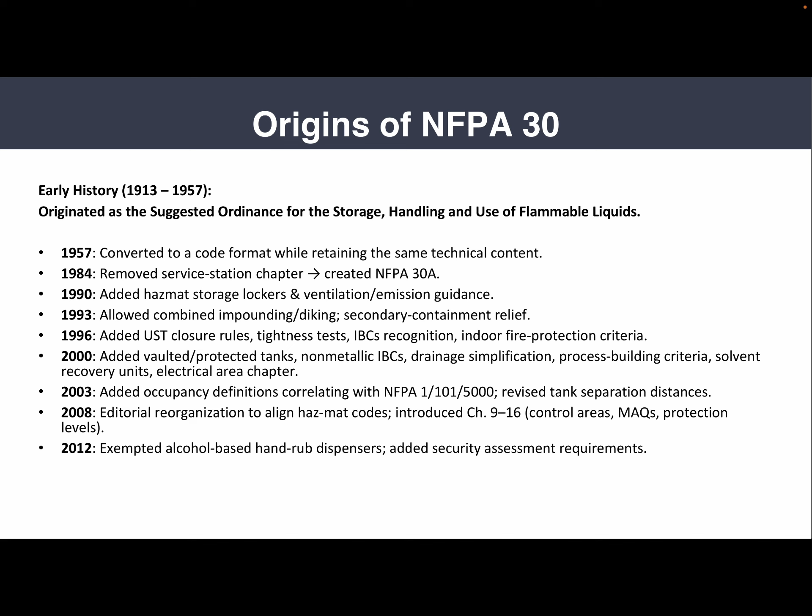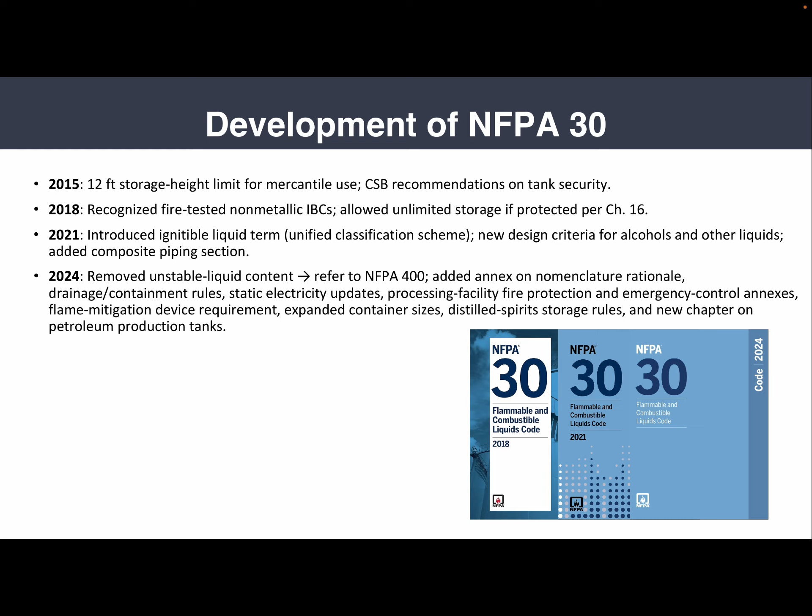Continuing the development of NFPA 30, in 2015 it set a 12-foot storage height limit for mercantile occupancies and adopted tank security rules. In 2018, it recognized fire-tested non-metallic intermediate bulk containers and allowed unlimited protected storage when criteria are met. In 2021, it introduced the term ignitable liquids to replace the old flammable and combustible system, making classification simpler. Finally, in 2024, it moved unstable liquid content to NFPA 400, added new annexes, and introduced flame mitigation devices. In summary, NFPA 30 grew from a simple ordinance into a comprehensive, data-driven code that reflects today's understanding of flammable liquid safety.

The contents of NFPA 30. NFPA 30 is structured so that each group of chapters addresses a specific stage of liquid management. Chapters 1 through 7 apply generally to any facility storing, handling, or using ignitable liquids. Chapters 9 to 12 cover storage in containers, portable tanks, and IBCs by occupancy type. Chapter 13 addresses detached unprotected buildings, while Chapter 14 covers hazardous material storage lockers. Chapter 15 governs outdoor storage, and Chapter 16 covers detailed fire protection design.

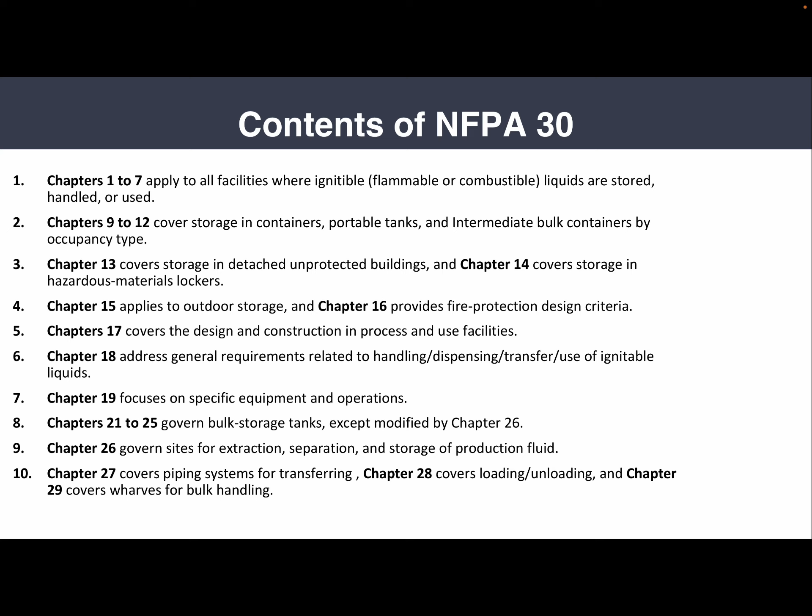Chapter 17 sets design and construction rules for process and use facilities. Chapter 18 covers handling, dispensing, transfer, and use of ignitible liquids. Chapter 19 focuses on specific equipment and operations. Chapters 21 to 25 govern bulk storage tanks. Chapter 26 adds requirements for petroleum production sites. Chapters 27 to 29 cover piping systems, loading and unloading facilities, and wharves. Knowing this helps move from general principles to detailed technical applications, and makes everything easier when you open the code.

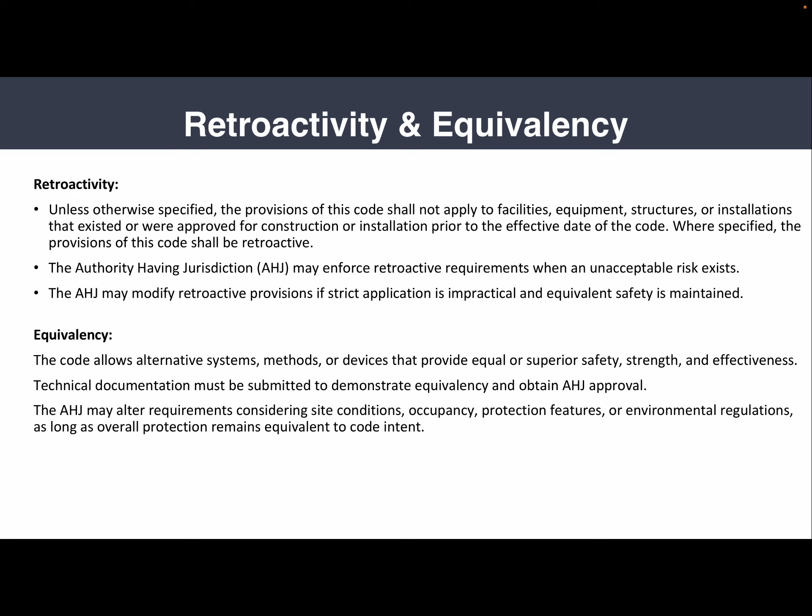The retroactivity and equivalency. NFPA 30 is primarily forward-looking. Its provisions do not automatically apply to existing installations or facilities approved before the current edition, unless a serious threat hazard exists. However, the AHJ, or authority having jurisdiction, may enforce retroactive measures if the existing condition presents unacceptable risk. The AHJ can also modify retroactive requirements when strict application is impractical, but equivalent safety measures can be shown. For equivalency, this allows alternative designs, systems, or devices that offer equal or superior protection.

Chapter 1, Administration. The applicability. NFPA 30 shall apply to the storage, handling, and use of ignitable liquids, which is flammable or combustible liquids, including waste liquids, as defined and classified. It serves as a model regulation intended to minimize hazards from flammable and combustible liquids while supporting safe commerce and industry.

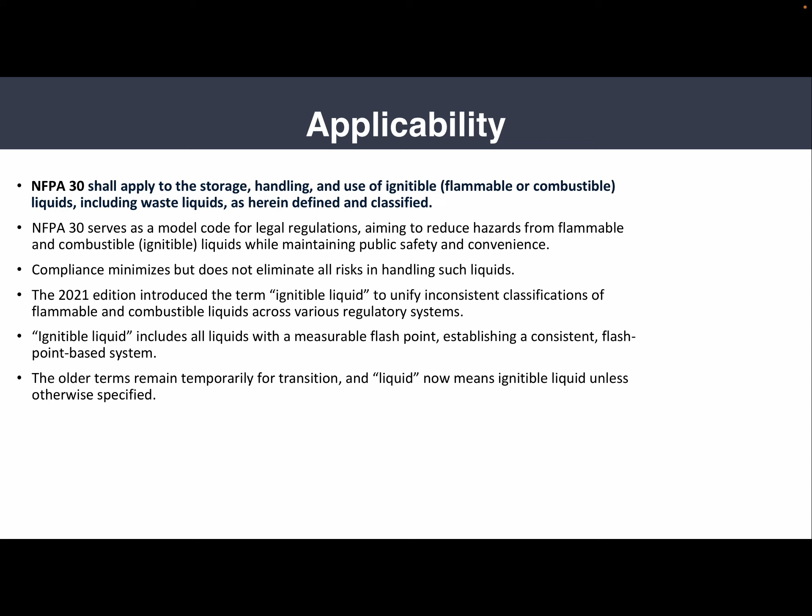So NFPA 30 serves as a model code. Compliance minimizes but does not eliminate all risk in handling such liquids. The 2021 edition introduced the term ignitable liquids to unify inconsistent classifications. Ignitable liquids includes all liquids with a measurable flash point, establishing a consistent flash point-based system. The older term remains temporarily for transition, and liquid now means ignitable liquid unless otherwise specified.

But also there's always an exemption. NFPA 30 shall not apply to the following: any liquid that has a melting point of 100 Fahrenheit, 37.8 Celsius, or greater; any liquid that does not meet the criteria for fluidity given the definition of liquid in Chapter 3 and the provisions of Chapter 4; and any cryogenic fluid or liquefied gas as defined in Chapter 3, since one is covered by NFPA 55 and the other by NFPA 58. Any liquid that does not have a flash point yet is capable of burning under specific conditions is also excluded.

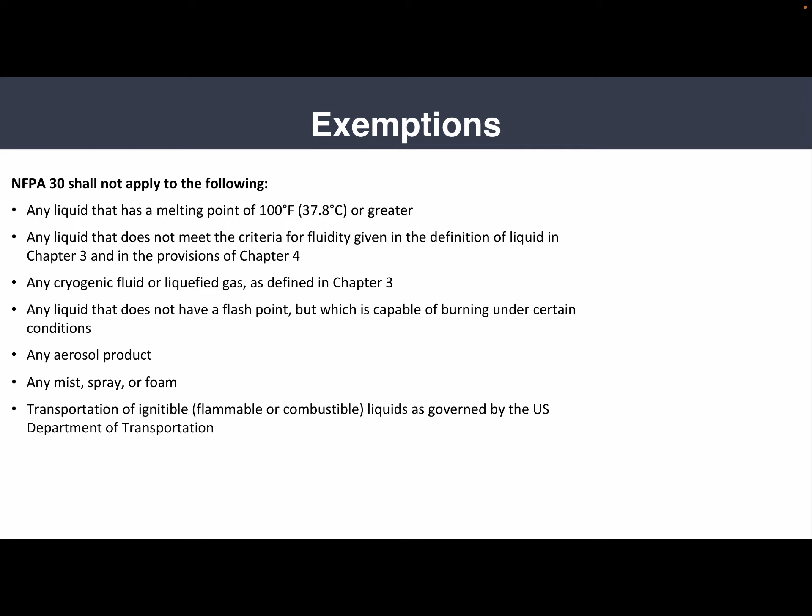Any aerosols, mist, spray, and foam are outside the code's scope. And transportation of ignitable liquid is governed by the U.S. Department of Transportation, the DOT, and not by NFPA 30.

Exemptions include the use of alcohol-based hand rub dispensers that comply with NFPA 101 or the adopted fire code, as well as liquids contained in the fuel tanks of vehicles, aircraft, boats, and stationary engines. Also, liquids that show no fire point when tested up to their boiling point are not covered.

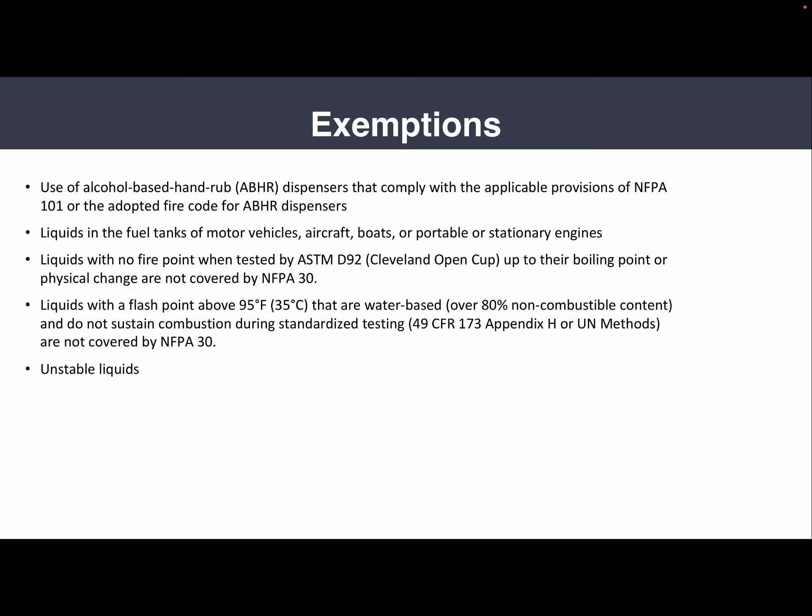Water-based liquids with over 80% non-combustible content that do not sustain combustion during standardized tests are also exempt. Finally, unstable liquids prone to violent reaction are managed under NFPA 400 instead. These exclusions allow NFPA to focus strictly on real ignitable liquid hazards.

Chapter 3, definitions. Here we have several key definitions. For example, alcohol-based hand rub means an ethanol or isopropanol solution up to 95% concentration designed to reduce microorganisms on hand. And a control area is a defined portion of a building where ignitable liquids are stored or used within the maximum allowable quantity limits.

And a fire area is a section of a building separated from the rest by construction having a minimum of 1 hour fire resistant rating.

And a barrel is equivalent to 42 gallons or 159 liters. And the boiling point is the temperature at which the vapor pressure of a liquid equals the surrounding atmospheric pressure.

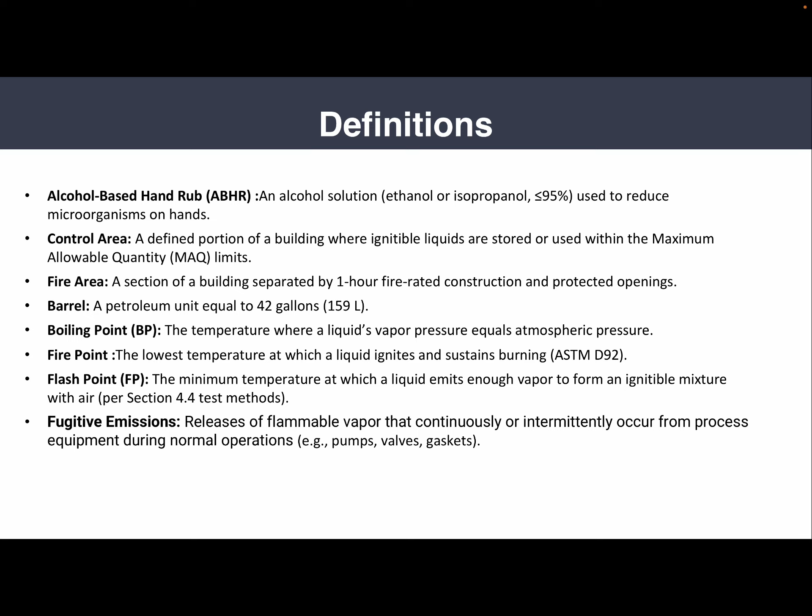The fire point is the lowest temperature at which a liquid will ignite and sustain burning, and the flash point is the minimum temperature at which it produces enough vapor to form an ignitable mixture with air.

And now here we have the key definitions for us. A flammable liquid refers to an ignitable liquid of class 1. A combustible liquid refers to an ignitable liquid of class 2 or 3. And ignitable liquids means any liquid with a measurable closed cup flash point.

A stable liquid will not react violently or decompose at normal pressure and temperature. An unstable liquid can decompose or explode when subjected to heat, shock, and pressure. A water miscible liquid mixes completely with water in all proportions.

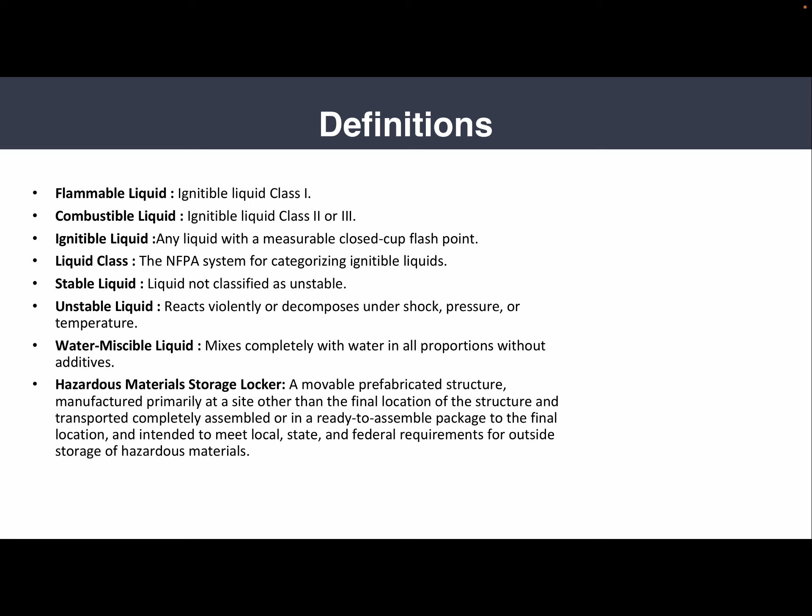And a hazardous material storage locker is a prefabricated or ready-to-assemble outdoor unit designed for code compliant storage of hazmat. These definitions lay the groundwork for every chapter that will follow.

Let's go back again. Class 1 liquids have a flash point below 100 Fahrenheit, which is 37.8 Celsius, and vapor pressure not exceeding 40 pounds per square inch at 100 Fahrenheit.

It is subdivided into class 1A, flash point below 73 Fahrenheit and boiling point below 100 Fahrenheit, and class 1B, flash point below 73 Fahrenheit and boiling point at or above 100 Fahrenheit. And we have class 1C, flash point at or above 73 Fahrenheit but below 100 Fahrenheit.

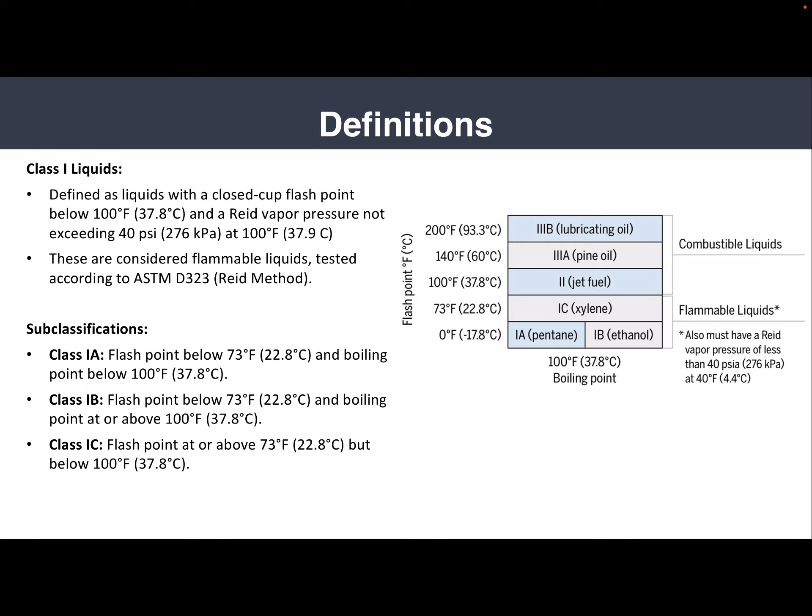And we have the class 2 liquids with a closed cup flash point at or above 100 Fahrenheit but below 140 Fahrenheit. And class 3, liquids with a closed cup flash point at or above 140 Fahrenheit. We also have sub-classifications for class 3, which is class 3A and class 3B.

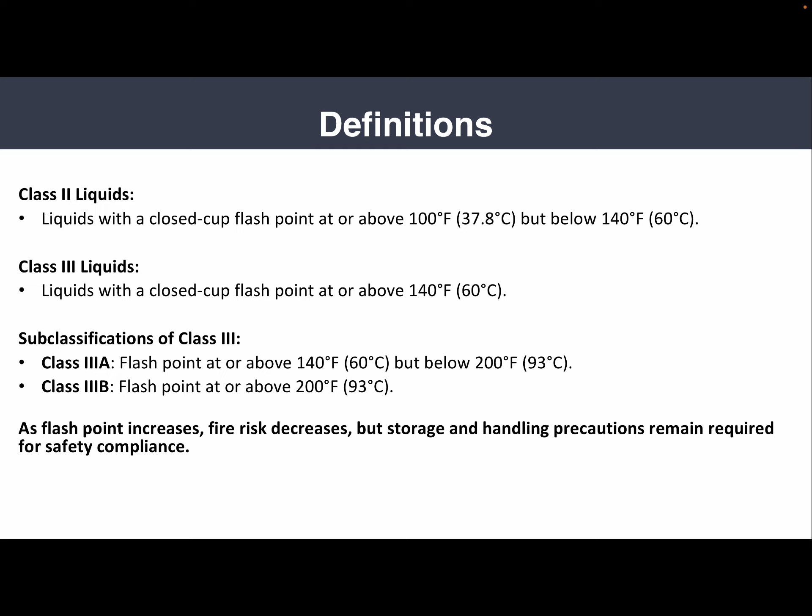One has flash point at or above 140 but below 200 Fahrenheit. The other has flash point at or above 200 Fahrenheit. So as flash point increases, fire risk decreases, but storage and handling precautions remain required for safety compliance.

And chapter 4 has the classification of liquids. This is just a diagram explaining the differences between all classes and the difference in temperature between combustible and flammable based on the flash point temperature.

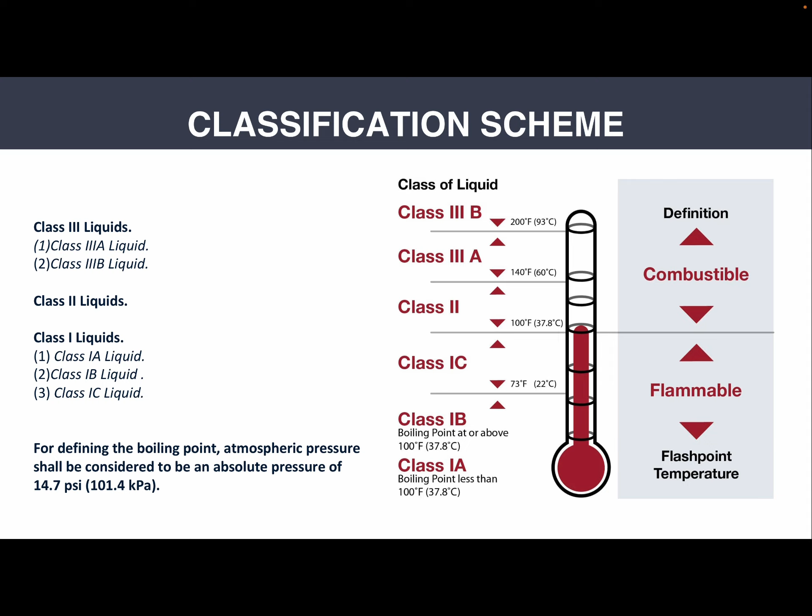A key point here for defining the boiling point: atmospheric pressure shall be considered to be an absolute pressure of 14.7 pounds per square inch or 101.4 kilopascal.

And chapter 6. Chapter 6 of NFPA 30 focuses on preventing the ignition of vapors and escalation of fires. It also established methods to identify, evaluate, and control fire and explosion hazards through management, analysis, and prevention. It requires engineering evaluation when handling liquids above flash point, exceeding maximum allowable quantities, or involving class 1 materials.

It requires facilities to identify potential ignition sources, such as open flames, electric sparks, hot surfaces, and static discharge. Also, proper ventilation, bonding, and grounding is essential when transferring or mixing ignitable liquids. Static electricity must always be controlled, especially during pouring, pumping, or any operations.

This code also references related standards such as NFPA 68 and 69 for explosion prevention and venting, and provides guidance for detection, alarms, and fire suppression systems using NFPA 13 and 750. It also guides housekeeping, leak control, and immediate cleanup of spills, which is critical.

Employees must be trained to recognize the hazards and follow safety procedures. So in short, this chapter ensures all the practical measures are taken to stop fires and explosions before they begin.

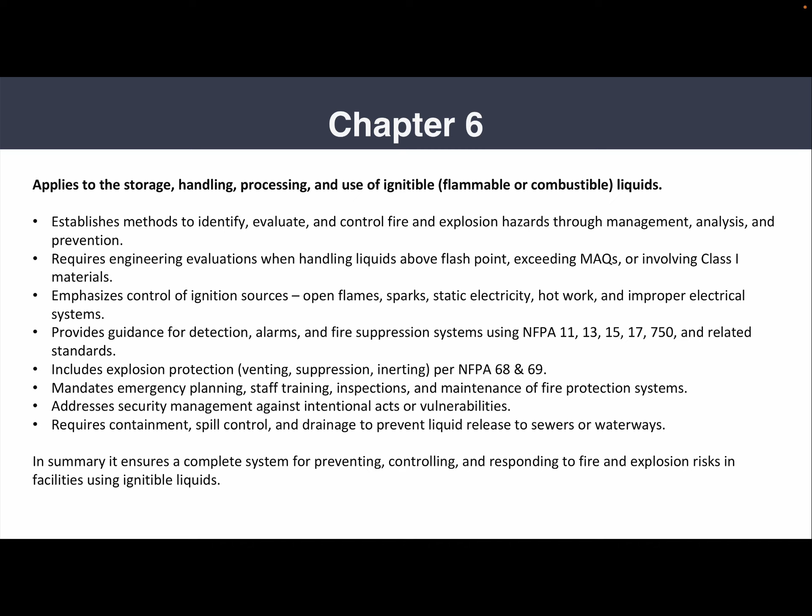Chapter 7, Electrical Systems.

The scope of Chapter 7 applies to all areas where Class 1 liquids are stored, handled, or used, and where Class 2 and 3 liquids are used at or above their flash points.

Electrical systems present one of the most common ignition sources in ignitable liquids operations. So Chapter 7 mandates that all electrical installations must comply with NFPA 70, the National Electrical Code. Areas where flammable vapors may exist are classified as Class 1, Division 1, or Division 2, depending on the frequency of vapor presence.

All wiring and fixtures within this zone must be approved for hazardous locations, and static grounding, bonding, and spark-proof equipment are vital. This ensures that a single electric arc cannot ignite vapors or gases released during normal operations or accidental leakage. Proper design of lighting, switches, and controls forms the foundation of electrical safety and should be correctly installed based on NFPA 70.

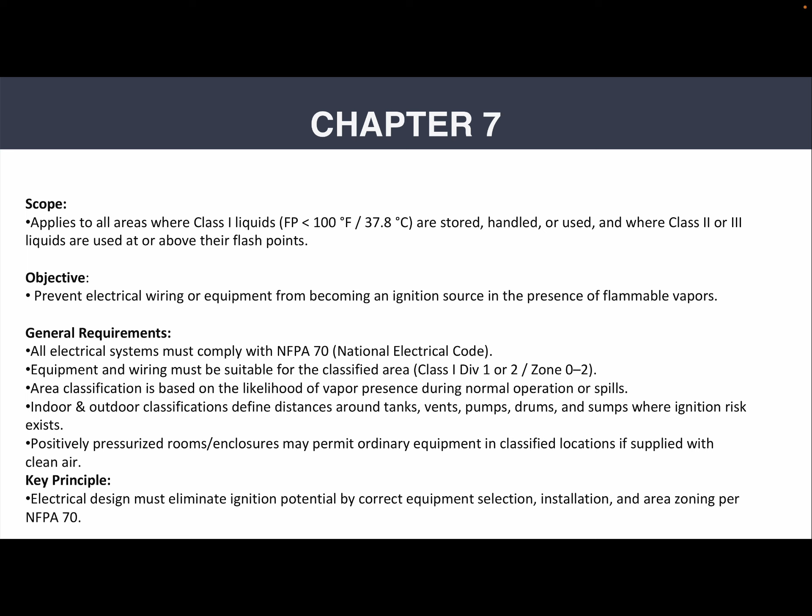Chapter 9, Fundamental Requirements.

Chapter 9 sets the general requirements for storing ignitable liquids in containers, portable tanks, and IBCs. It also establishes how storage areas should be separated based on the quantities limited per area and required fire resistance of barriers. Liquids must be stored in approved containers that meet construction and testing standards such as UL or DOT requirements, and spill containment, drainage control, and separation from incompatible materials are mandatory. This chapter also connects storage design to protection levels, such as sprinklers, cabinets, and control areas, ensuring a clear link between hazard level and fire protection design.

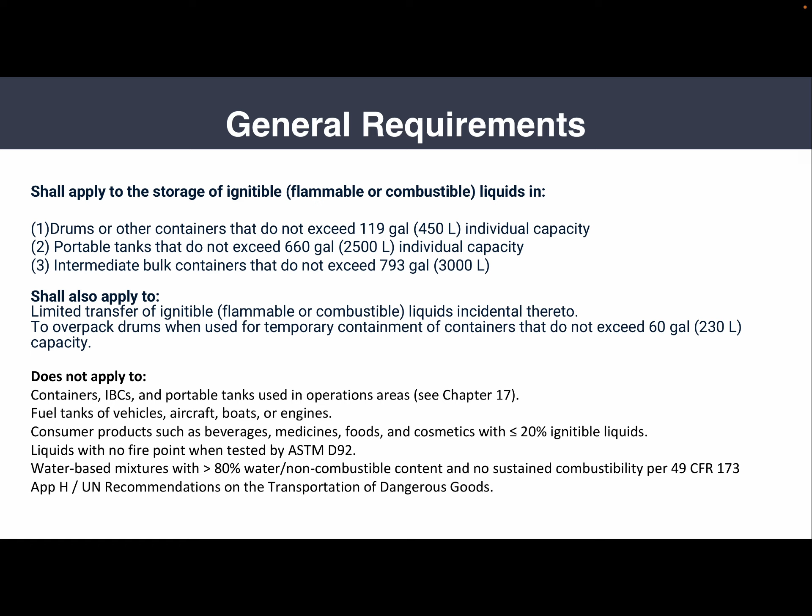In general, NFPA 30 specifies strict construction capacity limits for containers and portable tanks. Metal safety cans, non-metallic containers, and IBCs must all be listed and labeled by an approved testing organization. Non-metallic containers are allowed only when tested for resistance to static discharge and chemical compatibility. This chapter ensures that even the small storage unit can withstand heat, fire exposure, and accidental impact without catastrophic failures.

But more stringent requirements are set forth in Chapters 10 through 14. These requirements shall take precedence, and means of egress shall meet applicable requirements of NFPA 101.

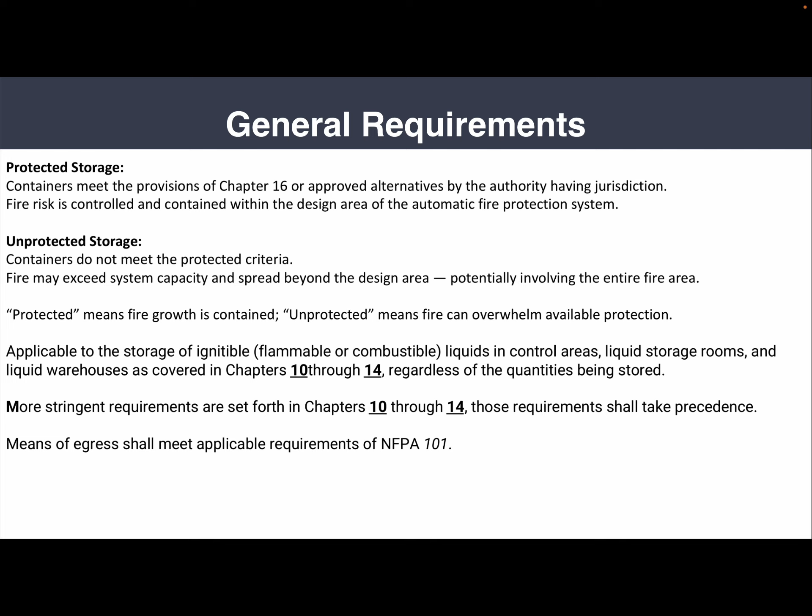Now we have the maximum allowable quantity and control areas. NFPA 30 introduces the concept of maximum allowable quantity, or MAQ, just like NFPA 400, which limits how much ignitable liquid can be stored within one control area of a building. These limits vary depending on the class of liquid and whether the area has sprinkler protection or approved safety cabinets.

But when MAQ is exceeded, additional control areas or higher protection levels must be provided. This system prevents excessive fire loading in a single compartment, and ensures that even if a fire occurs, it can be contained by the design of the building and its suppression system.

For the MAQ table 9.6.1, as a summary, MAQ may be increased by 100% when liquids are stored in approved storage cabinets or safety cans per the fire code. MAQ may also be increased by 100% in buildings fully protected with automatic sprinklers based on NFPA 13. MAQs for Class 1B and Class 1C liquids may be increased by 100% for consumer products, beverages, medicine, cosmetics,

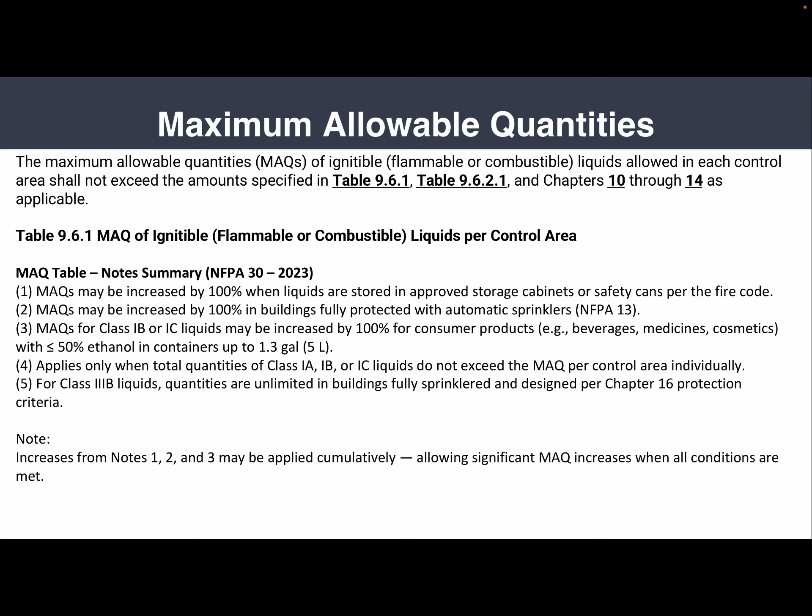And we have the special occupancy limits. For the following occupancies, the MAQ per control area shall not exceed the amount specified in Table 9.6.2.1, which includes assembly occupancies, ambulatory healthcare, businesses, daycare, detention and correctional, education, healthcare, and residential.

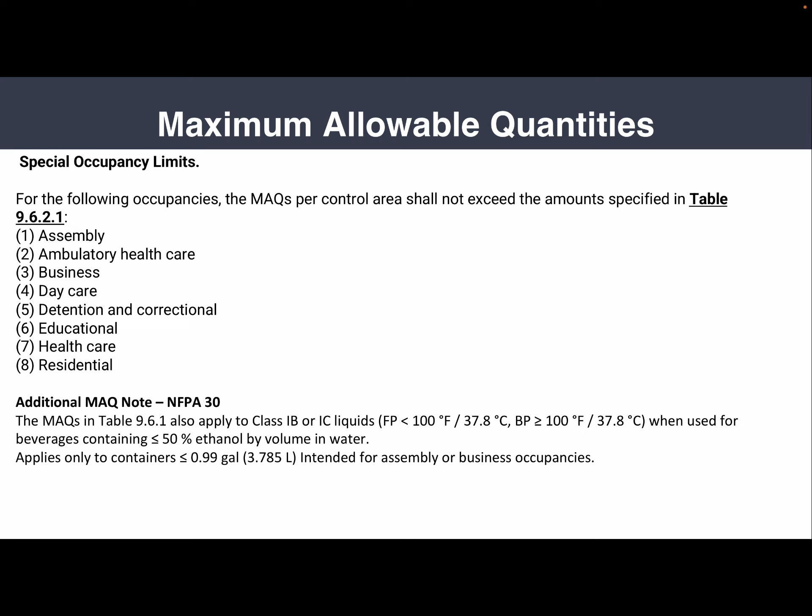So the MAQs in Table 9.6.1 also apply to Class 1B or Class 1C when used for beverages containing 50% or less ethanol by volume in water, and apply only to containers equal to or less than 0.99 gallons, which is 3.785 liters, intended for assembly or business occupancies.

As for control areas, as we mentioned before, a control area is a defined space within a building where ignitable liquids are stored within the MAQs listed in Tables 9.6.1 and 9.6.2.1. Multiple control areas can exist within one building, but each must be separated by fire-rated construction, and the fire resistance rating depends on the floor level and number of control areas, as shown in table 9.7.2.

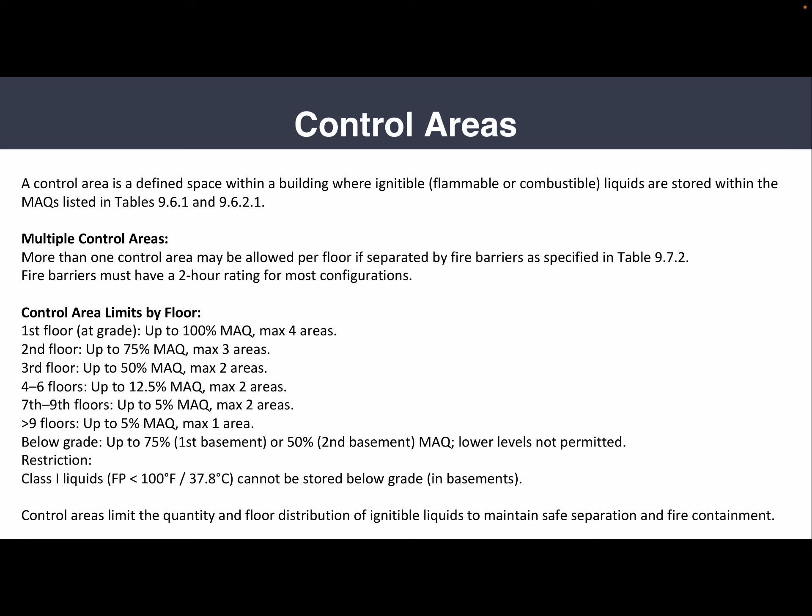So as you move higher in the building, the permitted MAQ decreases. In simple terms, the lower you go in the building, the more quantity can be stored. The higher you go, the stricter the limit becomes.

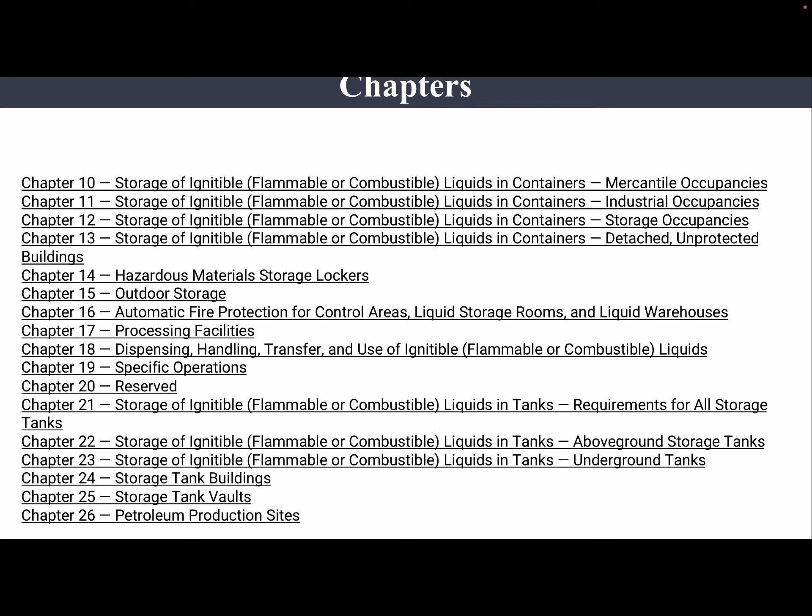And these are the rest of the chapters. Chapter 10 for storage of ignitable liquids in containers for mercantile occupancies, Chapter 11 for industrial, Chapter 12 for storage, Chapter 13 for detached unprotected buildings, Chapter 14 is for hazardous material storage lockers, 15 for outdoor storage, until we get to petroleum production sites. So this concludes.